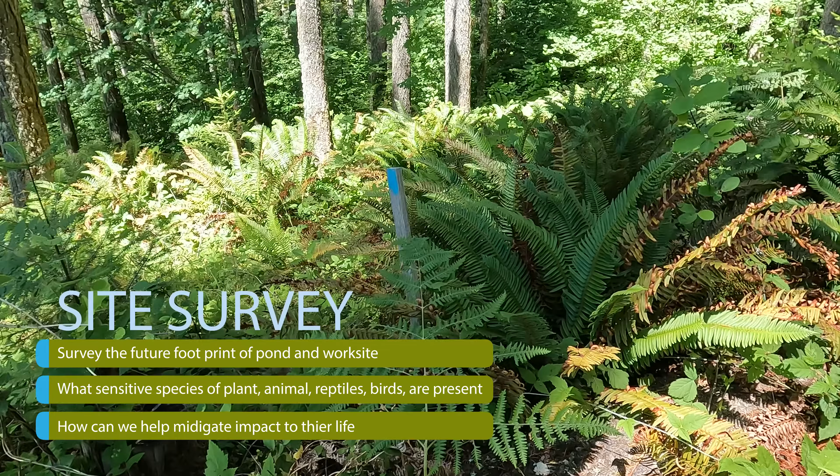You know, it's good to know what all the species are, both plant and animal, that would be impacted by earthworks in that area, and have a sense of if you're going to be impacting any sensitive species and potentially making a plan for also transplanting plants that could be used somewhere else in the environment or moved to a different area of the site.

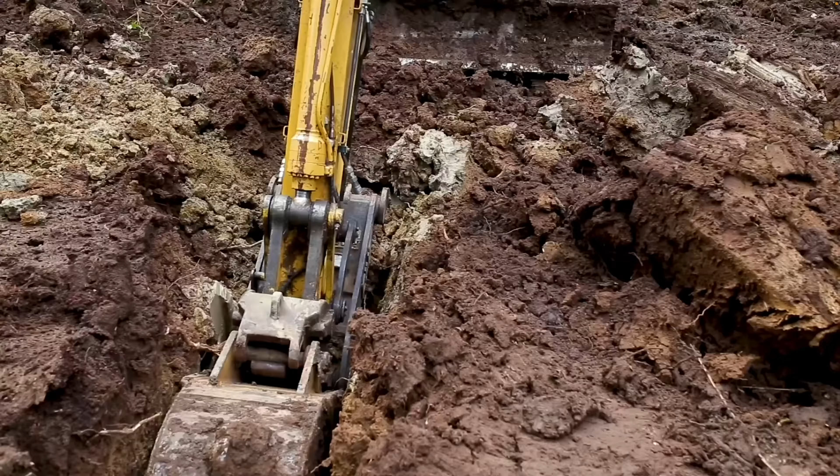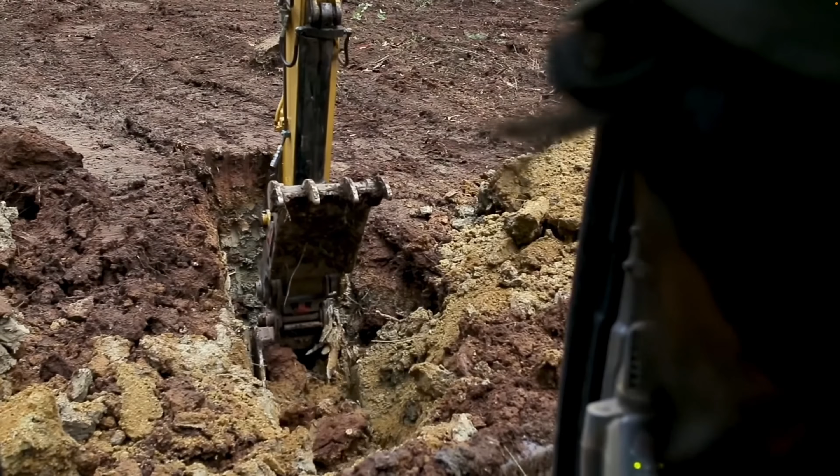A stage of equipment mobilization, potentially even prior to mobilizing large equipment for pond construction, is to have a machine that can dig a nice and deep test pit. So the test pit is very important because it helps you evaluate what type of soil conditions you have for pond construction. The day that you do the test pit is a day to both do field analysis of your soil and also collect soil if you wanted to send it off to a lab to have further samples.

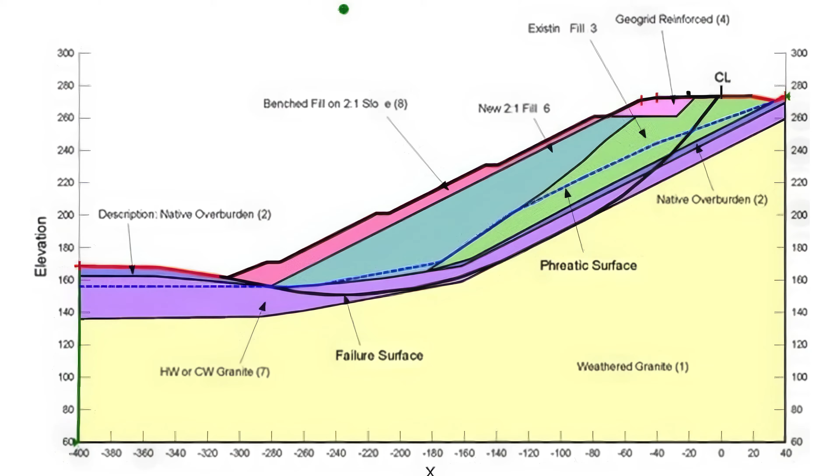It's also possible, and sometimes a very good choice, especially for larger ponds, to have a geotechnical analysis that's done by a professional, and they may even put down a series of boreholes. So there's really a scale of decision making around how much technical analysis you do. But if you're building ponds that need to be engineered, especially, and there's often with water resources departments requirements at a certain scale at which the ponds need to be engineered, a full professional geotechnical analysis may be called for.

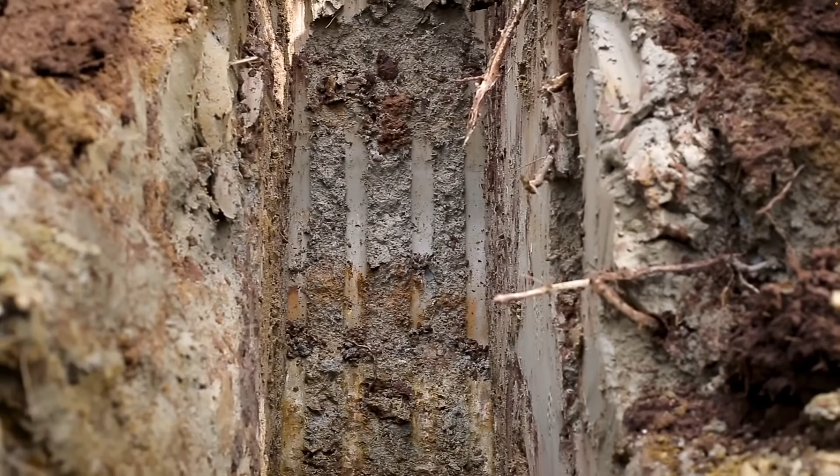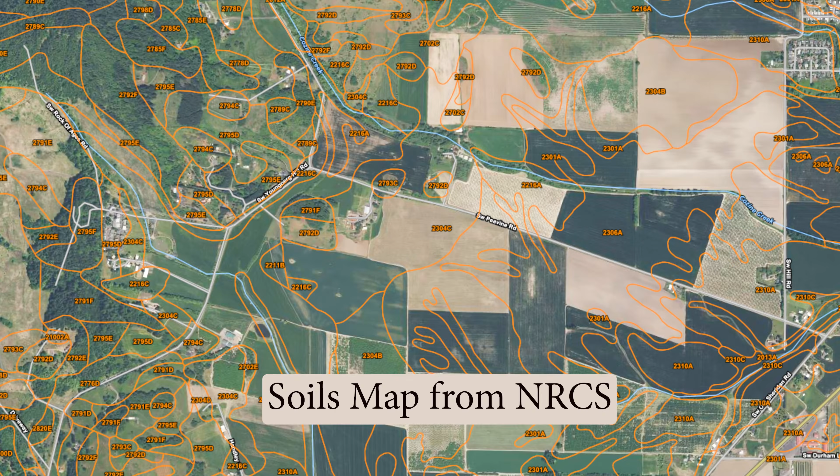When you dig the test pit, you'll be looking for a few things. You'll be looking at essentially proofing the data that you've already collected about your soil types from the NRCS or other soil resources. And so you'll be looking at the soil profile. You want to see what the conditions are of the different soil horizons. And though this really varies, you'll see that there's stratified layers within the horizons.

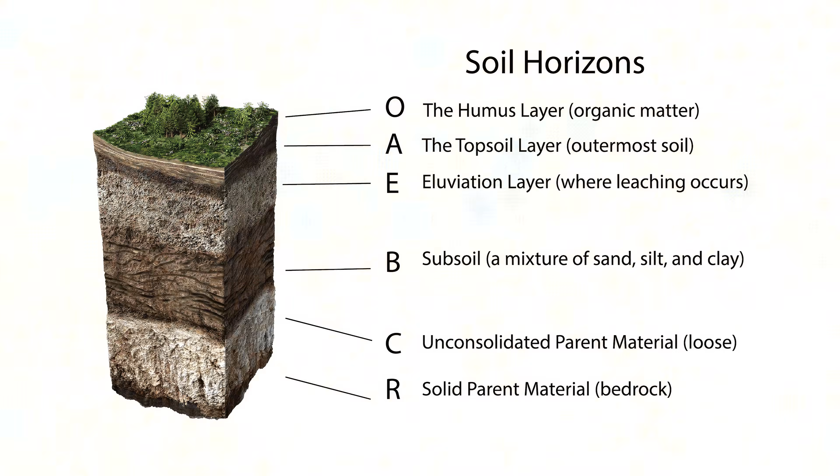And the ideal situation is that a soil horizon gives way as it moves down to a less porous soil, so that you would move from a soil that has water and percolation moving through it to a soil that is less porous and has water coursing over the top. And you may even see, after you've dug your test pit, that water is cascading down the side of that lower soil horizon. That would be a soil with higher clay content generally.

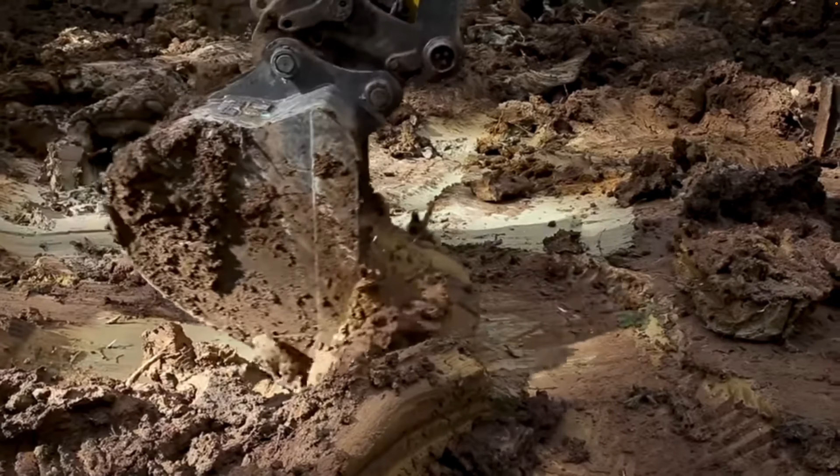And if you get into the subsoil and find that you have deeper layers of heavy clay, this is the material that you're going to be using to build the core elements of your pond and using to seal the pond. You want to dig a bit deeper than the planned pond depth in order to see what the entire layer of soil looks like below the pond. It's possible that a really good layer of clay could give way to fractured bedrock or cobbles from a creek bed at a deeper horizon. And so you really want to know the entire depth of your pond.

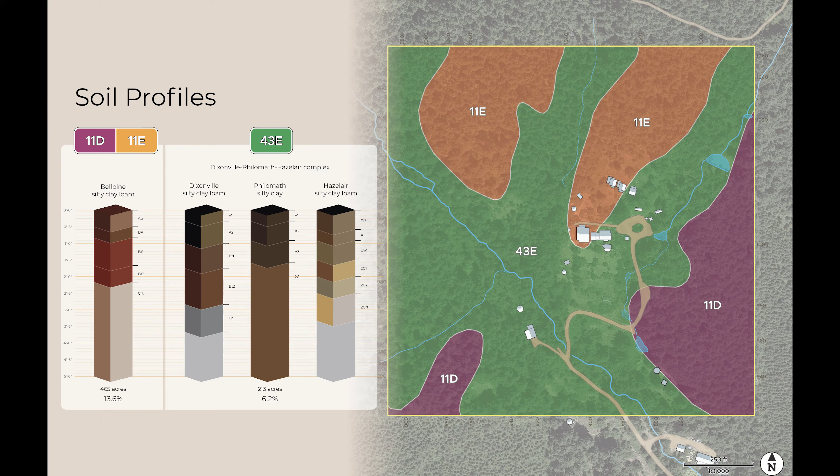Another possibility is that you find that you have soil that doesn't really suit a condition that leads to a natural seal. So you might have just a very sandy and porous soil all the way down. At this point, you'll be needing to evaluate whether or not you want to bring in material to seal the pond, or if there's another better, more effective approach to your project.

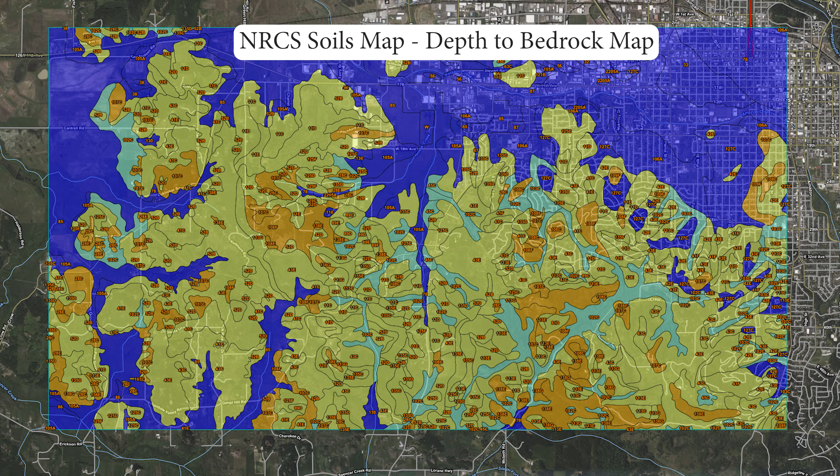The other thing that we are really wanting to look for is the depth to bedrock. In a lot of cases, the soil depth may be just a matter of feet before it gives way to fractured bedrock and then actual bedrock. And if that's the case, that's essentially going to limit the depth of your pond. So these are some really important initial notes to make.

So in addition to this work of looking at the cross sections of the soil, we also want to evaluate the structure of the soils. And so we can utilize a number of different field tests to look at that. We can carry out an analysis of the different soil profiles. And from each profile, we can collect clay and do a texture by feel analysis. And that's one way of determining whether or not there's enough clay to really adequately hold water. We can also look at the relative percentage of sand, silt, and clay by taking samples from each of our soil horizons and doing a jar test.

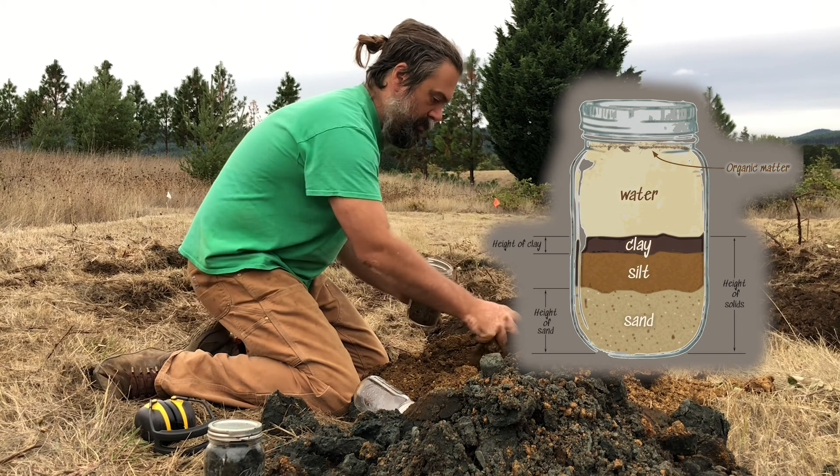Another field test is to look at water percolation by putting a nice gentle slope into your test pit, which is also really important as an aside to protect wildlife and critters and humans from falling into the pit and not being able to get out. You can use a nice slope to put in test holes for soil percolation.

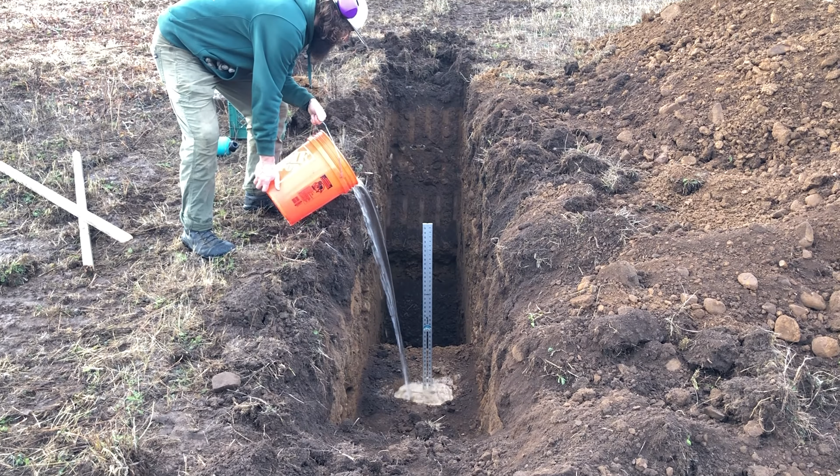And so we evaluate the rate of percolation to get another read on the soil's ability to hold water. We can also combine lab analysis with, like, the Emerson test and Atterberg limits to look at the way that clay reacts with water and expansion and contraction, plasticity. There's a lot of things that we can look to do this soil suitability analysis.

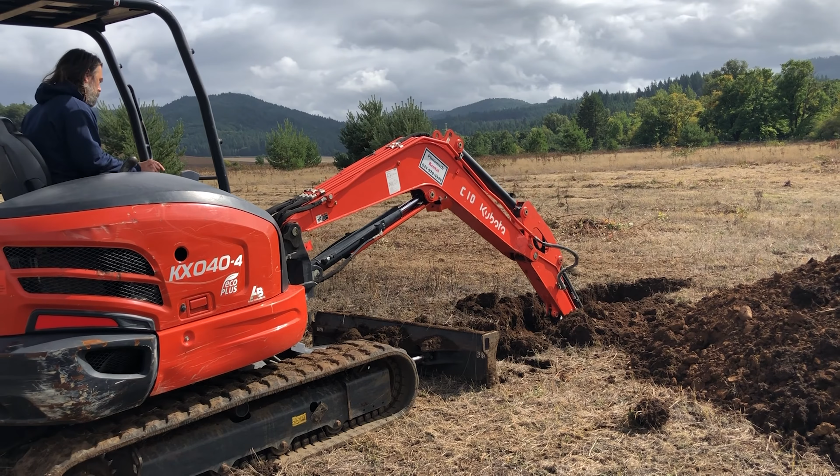One thing to consider for soil test pits is how many test pits you want to put in for a given pond. You probably want to put in a few because you're wanting to look at the entire basin. A few test pits at the dam site and a few back from the dam could be a good decision. You get your preliminary test back, and hopefully these tests really show that you are good to go for construction.

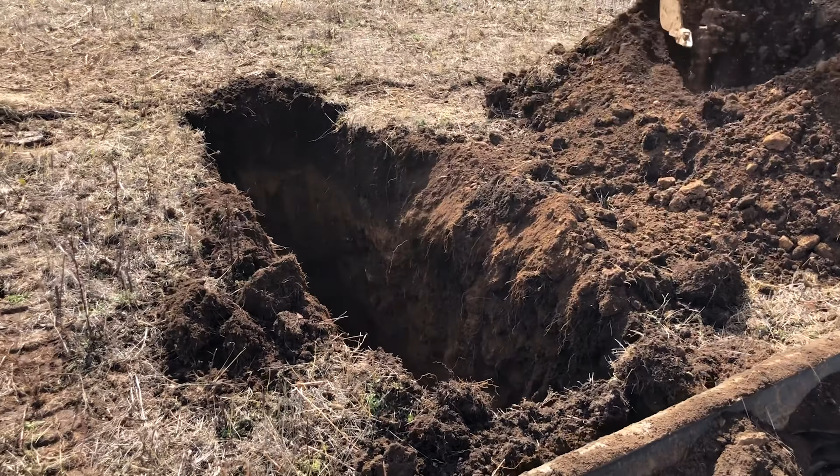Some of the constraints may also lead to further decisions around whether or not, for instance, large stored water is the best choice, or maybe you're going for a lot of just infiltration and bioswales and a different agroecology altogether. Or maybe you do need that stored water, so you're looking to bentonite clays or pond liners or something like that to really adequately hold the water.

Once we know where our pond site is, the next step is to generate cross-sectional and overhead view diagrams of the pond. We can look at how much soil we can expect to move. We can look at what is the total area that's going to be impacted, how many trees need to be removed, etc. We can start to perceive what some of the impacts will be on side slopes and things like that as we excavate to make sure that we're maintaining the proper inside slopes.

A cross-sectional diagram would show the inside slope of the dam, the outside slope of the dam, the width of the crest of the dam. It would show the back slopes of the dam and what those look like. It would also illustrate whether or not there's going to be internal terracing in order to do aquaculture and create different microclimates within the pond, and the depth.

Now that cross-sectional diagram can also illustrate the location of the clay that actually maintains a permanent seal on the dam and the bottom of the pond. When we look at a cross-section, we can see that there's really 3 ways to build the dam as far as the content of the soil type. The first and the best way to build the dam is to put in a key. Now, a key is really critical for assuring that the water doesn't move through the dam.

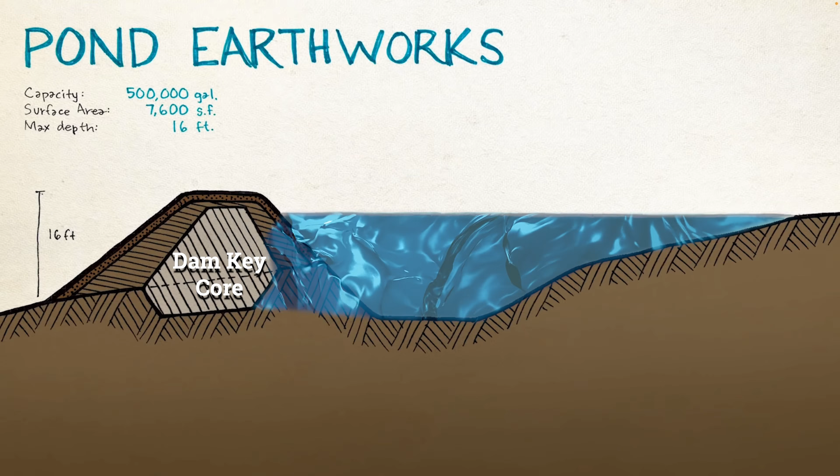As water moves through a dam, it sort of drops as it goes. It would slowly wick through a dam, and if it hits an interior clay core, a really well-built key core will prevent the water from moving all the way through the dam, which then would prevent channeling and piping through the dam that could lead to erosion and the blowout of the dam. It'll also just functionally keep water in the pond.

A keyed dam is built with an internal key that goes up and above the ultimate height of the water. The topsoil and the less clayey material creates a skin on the top and the sidewalls. Now the dam itself also has some very critical components. The best type of dam one can build is a dam that has a central clay key.

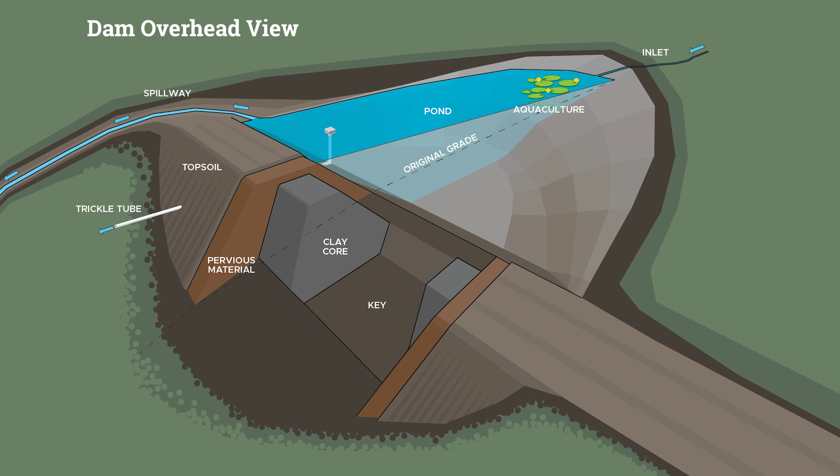It gets built into a trench that crosses all the way across the length of the dam from both sides of the valley. And this is where you put the best, heaviest clay material, and you'll build that key up, starting from that trench all the way up to your desired water level. So the key is a critical element.

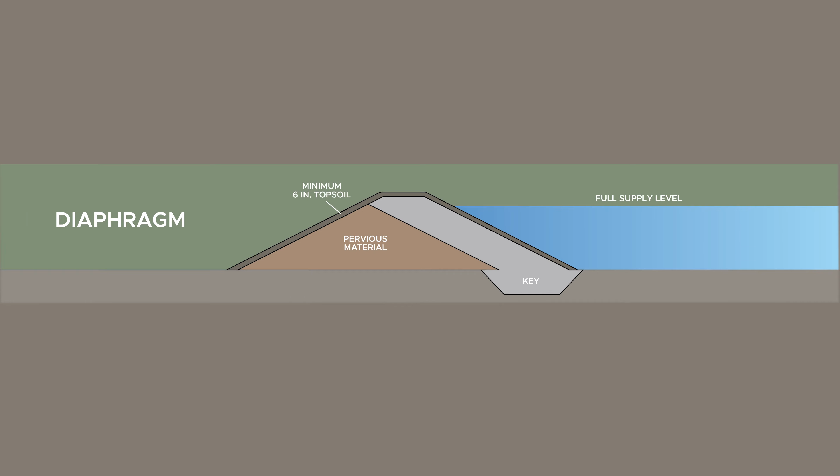If you don't have enough clay to build up a key, there is a second type of dam that can be built, and this is called a diaphragm dam. So this would be a situation where you essentially continue that clay blanket that's on the bottom of the cutoff excavation, and you work it all the way up the side of your dam. So you have an interior liner of clay that serves the purpose of preventing excessive water movement, at least through the dam.

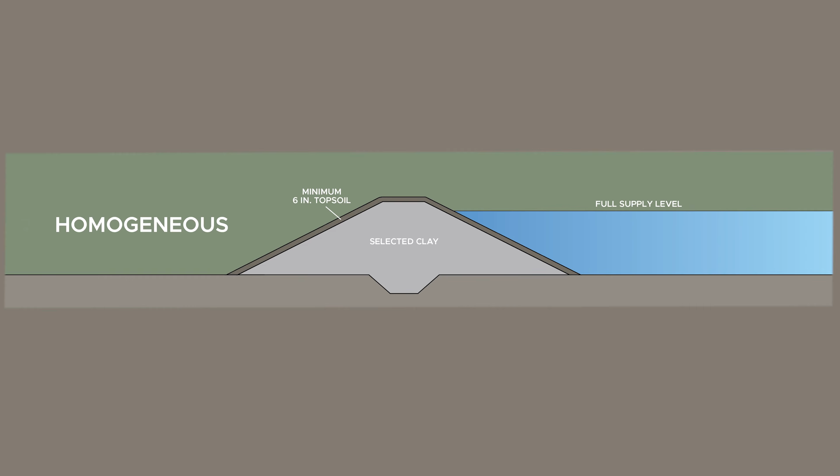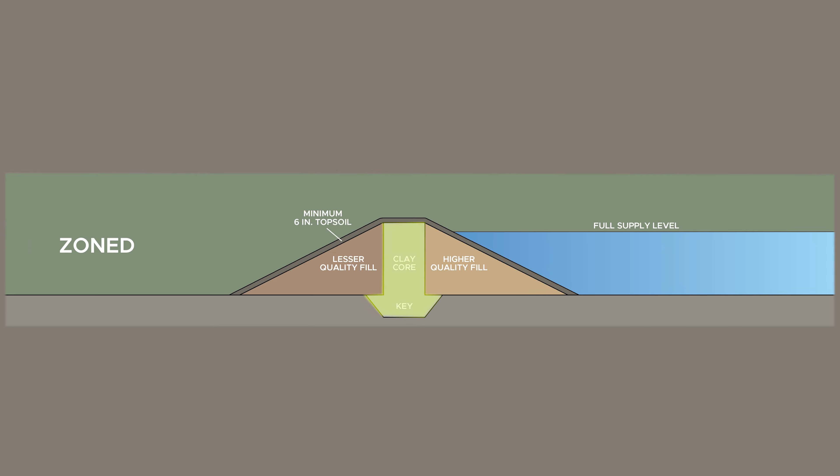A third type of dam, which really is not recommended and that I really try not to build. In theory, if you have enough clay, you can just build what's called a homogeneous dam, which is a dam completely constructed of clay, where the wall itself is keyed into that trench at the bottom center of the dam. Still, it's always a good idea to really maximize the heaviest concentration of clay at the center of that dam to create that permanent seal.

Starting from the bottom of the pond, it's very important to keep in mind that the bottom of the pond needs to be excavated all the way down to the impermeable layer.

So if you have clay, the bottom of the excavation, and this is called the cutoff excavation, should be at that impermeable layer and connect with the dam. The dam then sits on top of a keyed in depression that goes even deeper into that impermeable layer.

Now, if in your excavation you dig down and you hit fractured bedrock or some more porous layer at the bottom of the pond, a workaround for that is to lay down a blanket of clay that sits atop that layer, which ultimately would be the impermeable bottom of the pond. And it's very important to key this into the dam so that there's a complete seal along the entirety of the bottom of the pond.

So if we now look at the pond from a bird's eye view, we can talk about some other key elements. One is the spillway. So the spillway is the way that we pass live flow around the dam. Every pond needs a spillway. The spillway needs to be designed to handle the flow or the discharge of the watershed through itself, and the ideal spillway is built to handle 3 times the total storm flow coming off of the pond.

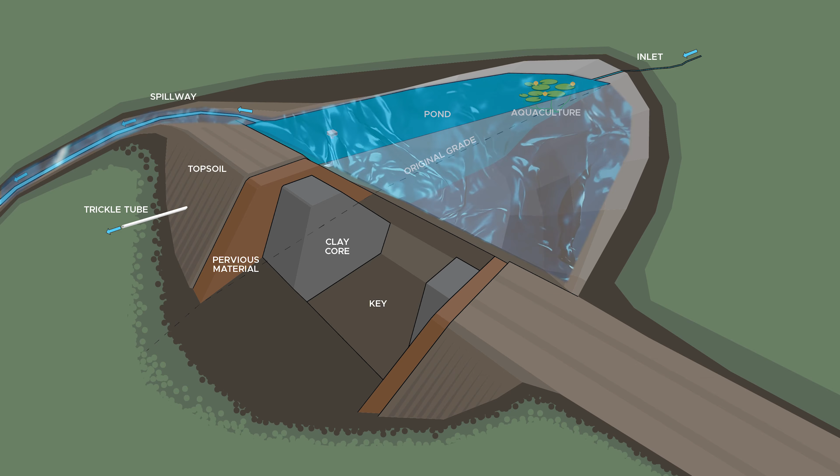The first key to a spillway is that it is not built over or even within any of the loose soil that is left from the dam construction, but instead is built around the dam into the native soil on one side or the other of the valley. The spillway is for moving flow out and around the pond when the pond is full. The height of the bottom of your spillway is going to determine your ultimate water height in your pond.

The ideal scenario is that from the top of your dam to your water height, you have typically 3 feet for large ponds, and for small ponds, at least 1.5 to 2 feet of freeboard. So freeboard is the term for the distance from the ultimate water height of your pond to the dam top. Now this assures that under no condition will water go over the top of your dam and find a new point to flow over and erode the dam. So the spillway sets the height of your pond water and therefore your freeboard. Technically, freeboard represents the vertical distance between the top of your spillway and the top of your dam.

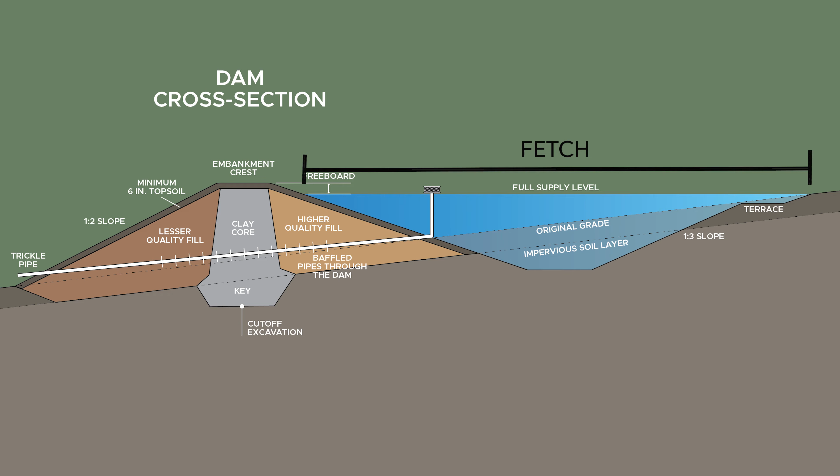One way to determine the height of your freeboard is to look at the horizontal distance from your dam to the backside of your pond, and that's called the fetch. The longer the fetch, the more potential you have for wave action, which could lead to the water overtopping the dam. One way to minimize fetch is to build an island and have that island intervene in the wave action that could be affecting your dam.

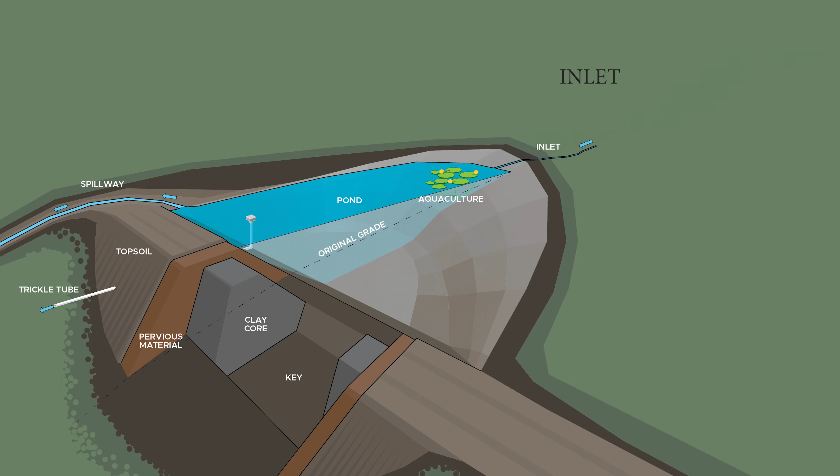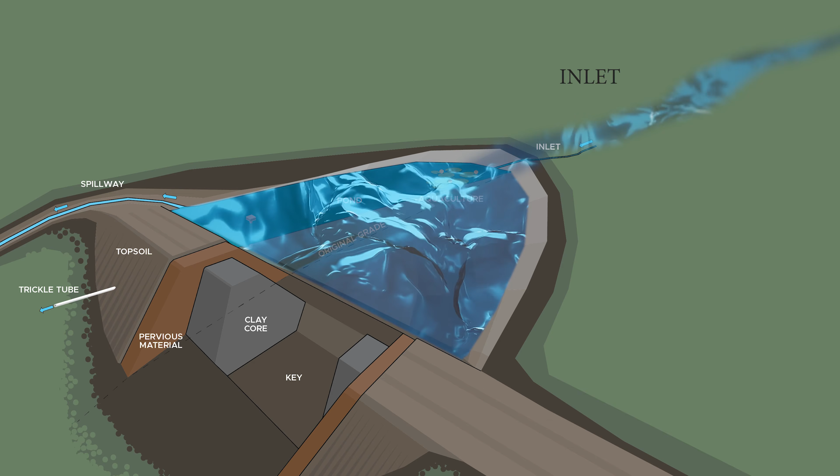Another element to consider is your inlet. On steeper ground, as you construct your pond, you can create steeper banks behind than the natural landscape condition, and in those situations you may have water seeping down or pouring down those banks. It can be really important, one, to make sure that the backside of your pond is built to accommodate some saturation in water and won't slump after the excavation.

At the inlet itself, where the water courses through, you might see an erosion gully form and a head cut, and this could be one place where that water causes erosion and leads to slumpage and accumulation of sediment in the bottom of your pond. So right away, it can be a good idea to put live stakes or woven bundles of willow and red stem dogwood or any other type of woody riparian plants that you have on hand to anchor that space. In the near term, those live stakes may not provide very adequate erosion control.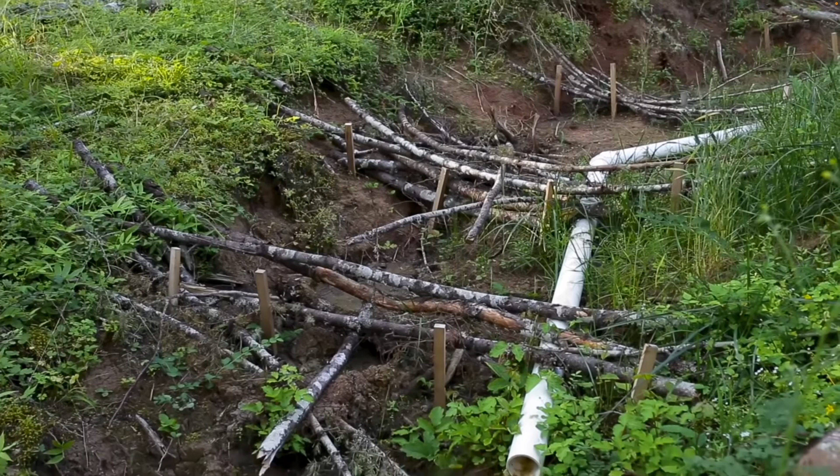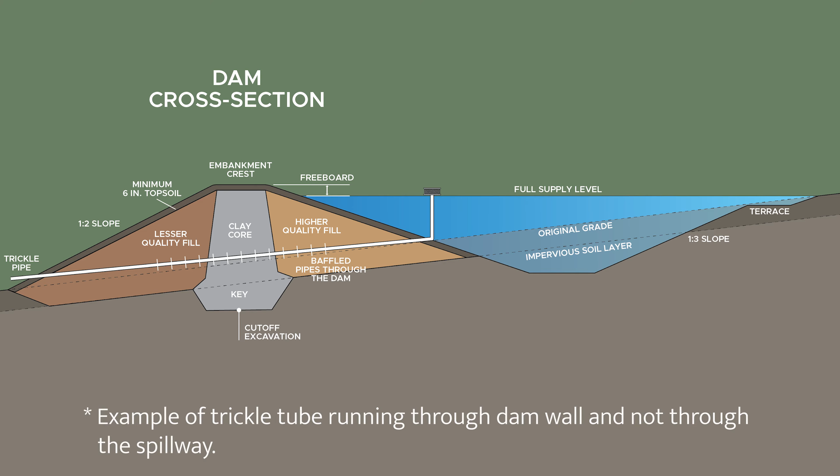Another element to consider in the process of construction of the spillway is the trickle tube. So a trickle tube is classically used to minimize small seasonal flow over the spillway. So this cuts down on just the long-term erosion of a small trickle as it moves over the spillway. It basically skims surplus water and moves it via a pipe around the dam and puts it back into the channel. The trickle tube can be installed at the same time as the spillway is built in connection to the dam. And it usually wants to just run right through the edge of the dam and out. You would basically be wanting to have a tube that's big enough to accommodate your seasonal flow.

And the spillway then can be thought of as a way to handle surplus flow and storm surge, as well as if you have larger flow during certain times of the year, that would be more likely the route for that surplus water. The trickle tube can also be used as a way to skim a portion of the surplus and route it out to another storage. So a trickle tube also can be a way to carry water via a pipeline to another pond.

So in this way, if we're actually diverting water out of a drainage, we can be sure that the bulk of the water during the rainy season continues through the spillway and through its natural riparian ecosystem. But the surplus water, or a portion of that surplus, can flow to the trickle tube and be carried out and beyond the valley. It can be carried out to the ridge, or it could even be allocated to go to a valley pond the next ridge over.

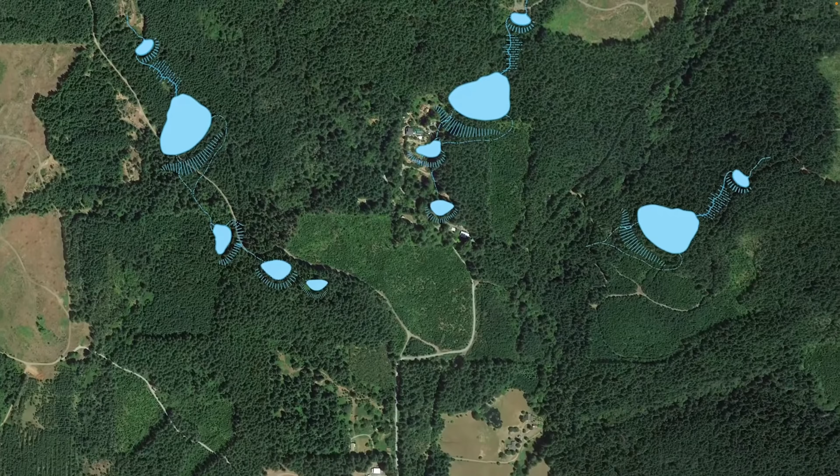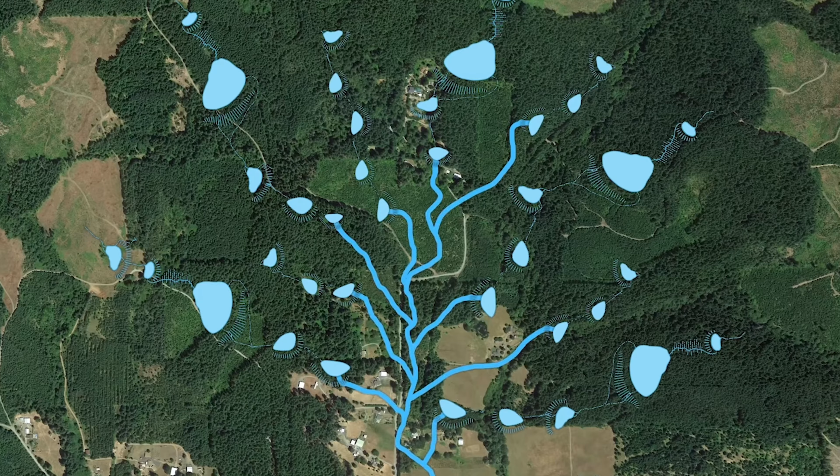If I feel like there is an intact riparian ecosystem with the integrity of a natural waterway, I don't like to take water out of a valley and permanently divert it into a next valley over. It's important to consider as you move water from valley to valley, if you're doing watershed scale earthworks, that you might not want to steal too much water out of any given valley. So a trickle tube is a way to take just a small amount.

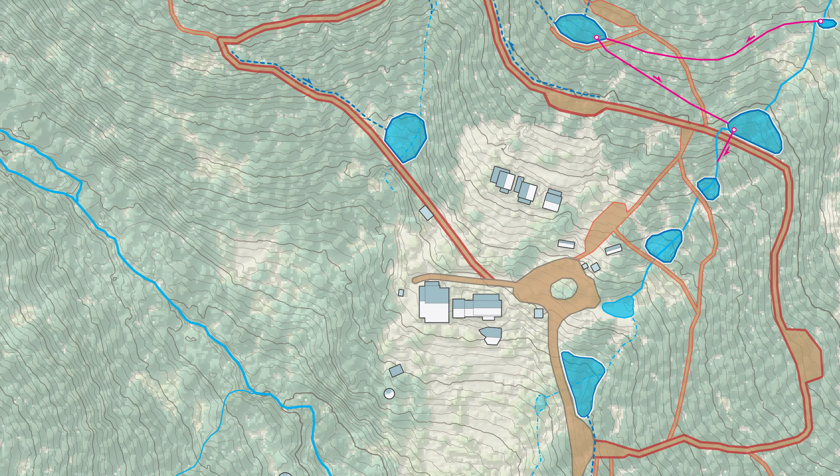You can also have an overflow swale that's separate from your spillway to do a similar function if you have the type of soil and the surplus water to do that. Generally speaking, I think it's very important to consider the idea of moving water from valley out to the ridge and back to the valley before just moving it from one valley to another.

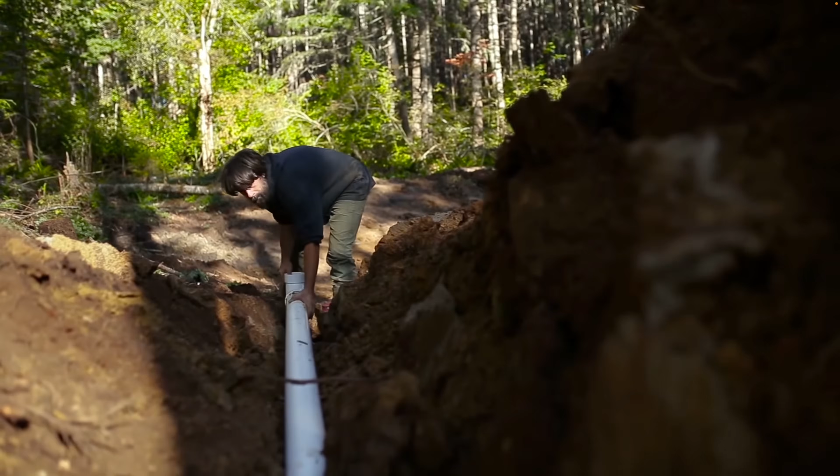The final element to consider is the outlet pipe. You'll want an outlet pipe if you're using this water for any irrigation use. It's important for aquaculture and fish culture, and it is also important for draining and servicing the pond. Oftentimes, people will build the outlet pipe right through the center of the dam. In that case, the most important thing is that this pipe is made of long-lasting material. I would recommend just using a good PVC.

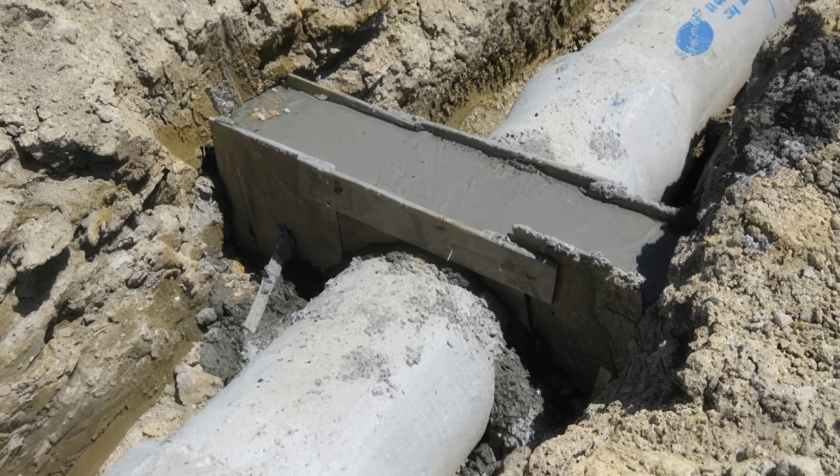Very importantly, this pipe should have cutoff collars installed along its length. And what these do is they prevent flow from moving along the pipe and eroding along the pipe and creating a tunnel through the dam. The proper and long-term well-being of the cutoff collars is really important. People will pour concrete forms around the pipe as it's laid through the center of the dam. You can also use rubber collars that slide along the pipe. And if it's a steel pipe, also weld cutoff collars.

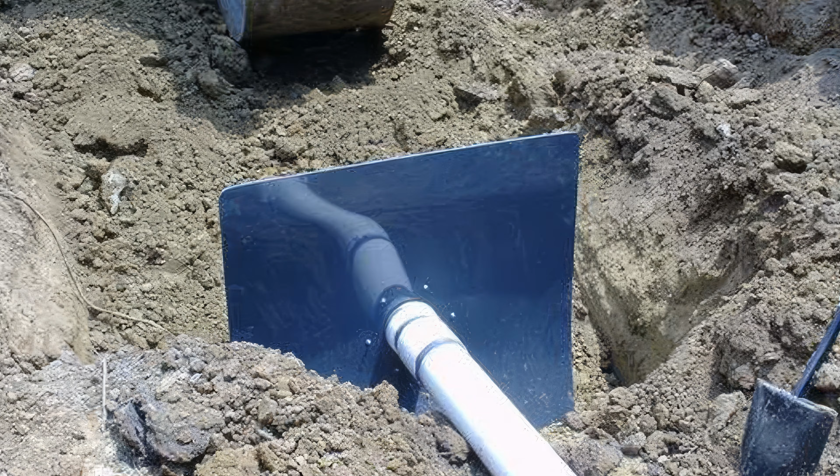The trickle tube usually just has a single cutoff collar. You can have more than that, but the trickle tube also needs to be outfitted with a cutoff collar. Another option for the outlet pipe is to have the pipe just go right over the top of the dam and have a siphon. That's a sort of easier and safer way to go, but it takes a little bit more maintenance.

You can run your pipe up and over into a screened intake in the pond, have it go up and over the dam and back down, and there's certain conditions you need to be able to create an adequate siphon with enough drop to really get that water moving well and into the pipeline. The siphon can be primed simply by filling a 5-gallon bucket and pouring it into a T at the top of the pipe from the dam. So that's a nice sort of low-tech way of priming the pipe.

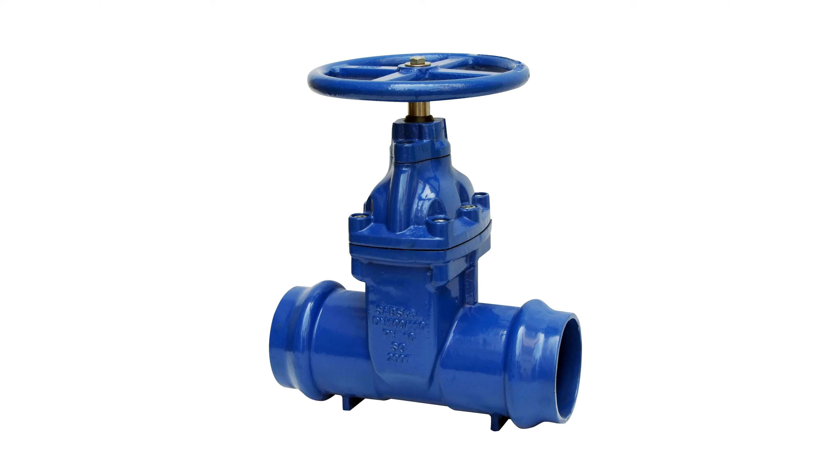Valves for controlling the flow of water through the outlet are important, and it's important to use a gate valve type, which would be one that you can screw down slowly and open slowly in order to moderate the flow and not have it come out in a single burst.

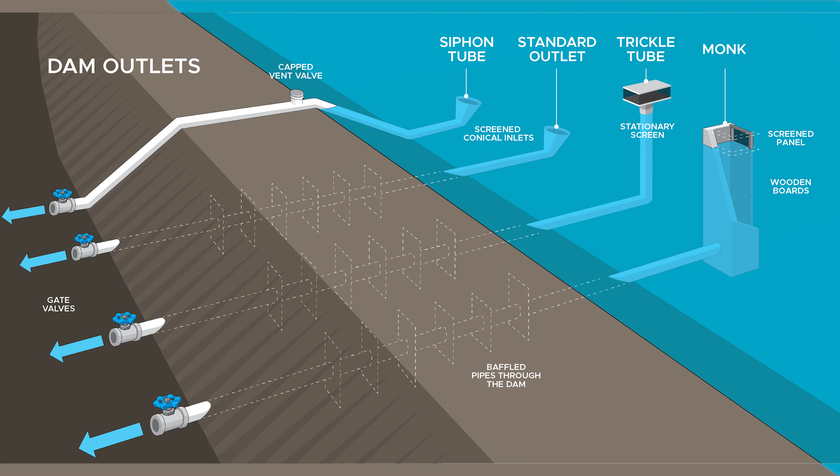The valves can go on the inside, within the pond, or outside, and it's really a matter of preference, but most people put the valve on the outside of the dam because it's more accessible and it's not exposed to water. The outside valve can take more pressure, so it can end up being more leaky, but the inside valve, being exposed to water, can degrade quicker. It's a little bit more challenging to maintain and to service.

So my process with construction is to start by clearing the topsoil of all organic material and debris and getting down to what feels like an adequate workable material for the main frame construction of the pond. This means that we're removing at least the organic and maybe the A horizon of soils. That typically just gets pushed downhill of the dam, and we'll use that later to skin the entire outside of the dam.

The area that gets focused on next is the cutoff excavation zone of the dam itself. So we're excavating down to the point where we have the adequate type of non-porous and strong material to anchor the pond dam into.

So we'll excavate that material down until we're at that satisfactory depth, and also relative to the ultimate depth of the pond itself. Then at the bottom of that excavation, we build a little key for us to start piling the best clay, the best heavy, strong material into the core of the dam, and we'll build that up.

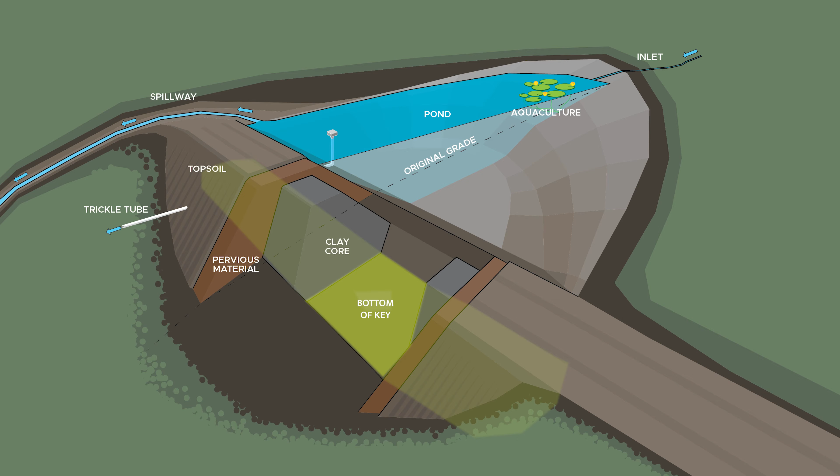As we make that excavation, we want to be careful, first of all, not to scratch and break up the dirt, the clay material at the bottom point where the dam will anchor into, because that can create a weakness point. But we can go to the outside edges of the dam where it's going to key into the side of the valley and create notches with the bucket, the teeth of the excavator, for it to get packed and keyed into on both sides.

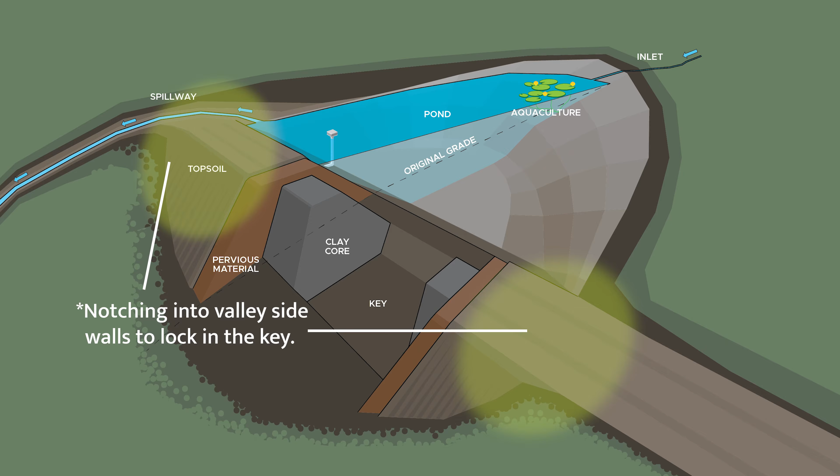Once we've done that, we can start to build up the key. Now, if this surface has become really dry, it might be necessary to wet it down a little bit to get that good connection. And we'll start to add layers into that core. And as we build it up, we want to build this core up as we go, so that that perfectly thick clay core goes all the way up to above the height of the ultimate water level.

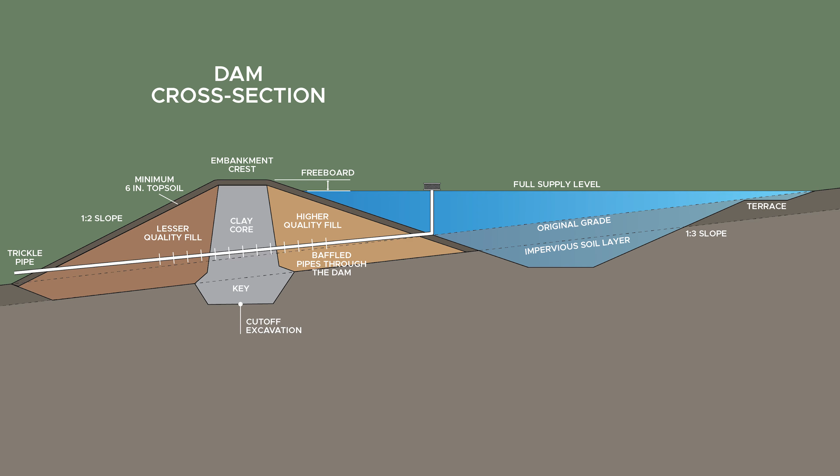Sort of simultaneous to this, we're stealing material from other subsurface soil horizons adequate for dam construction and piling that on both outside edges of the key. And as we go up every couple inches, we want to make sure that we get adequate compression on the top of this dam wall to make sure that it gets really compacted and stabilized.

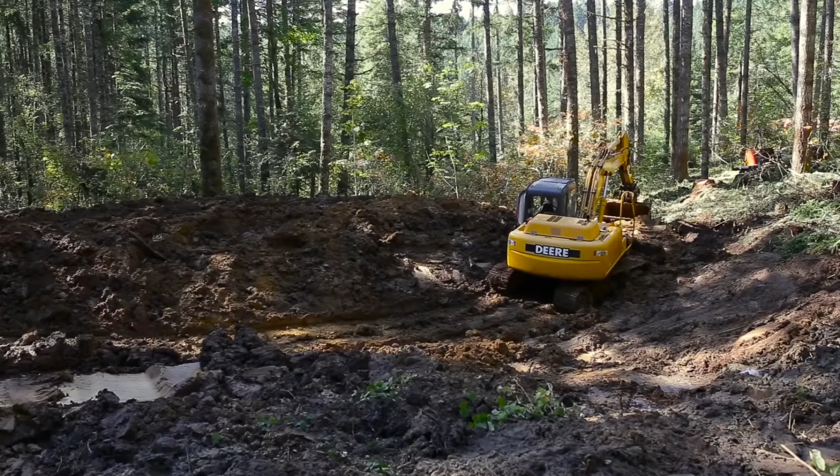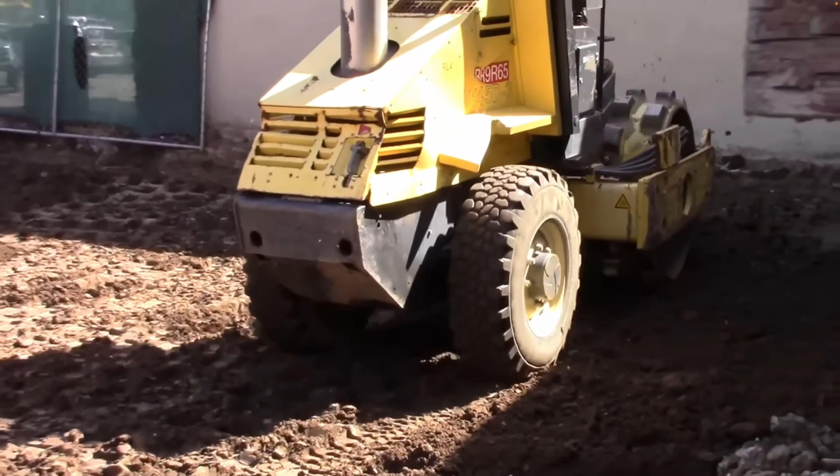Usually it's really useful to use a sheep's foot roller to do that compaction, and there's calculations that can be made by volume and by the type of clay that we're working with to determine how much weight and how many passes of a roller we need to utilize in order to get that good stability. We can also track roll with the machines we're working with, bulldozer, excavator.

On small ponds, I have actually used a rototiller to till and create a compacted layer, and doing that as we go all the way across. The rototiller actually creates a good compacted layer below it in the clay soil. So compaction is really important.

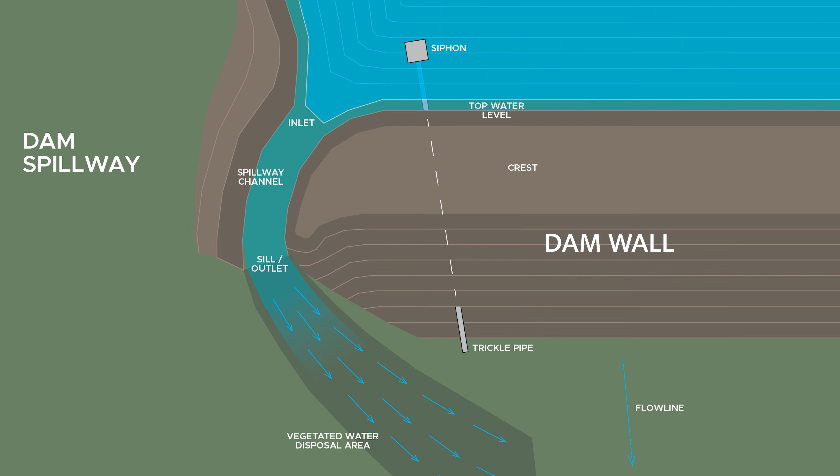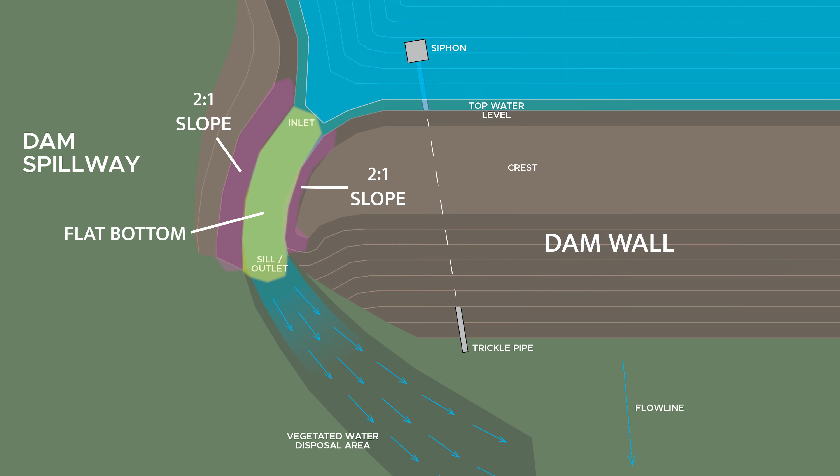As we build the dam up, we get to a point where we can be looking at the connection to our spillway. And so once we have built up to that ultimate dam height, we can cut that spillway into the side of the dam, into the native soil of the side slope of the valley. And that then gets built with the same 2-to-1 slopes on the outside and a flat bottom, and designed so that it can pass that water well around the dam. You never want to build a spillway over the top of a constructed dam, as it will erode the dam.

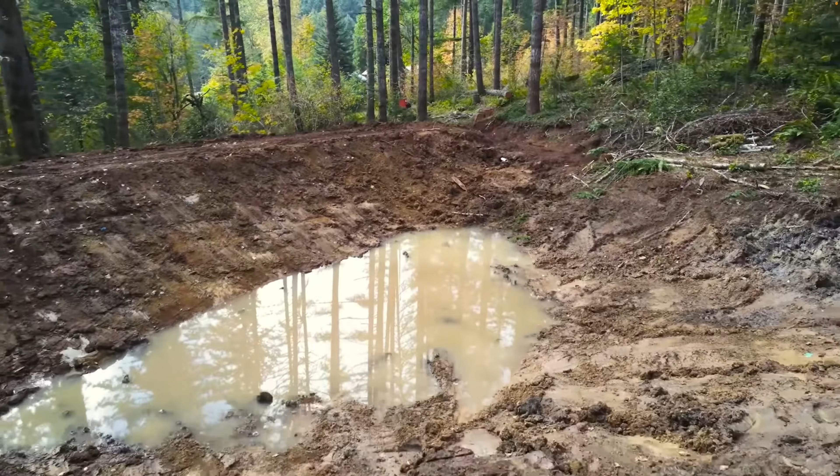Once we feel that we've adequately gotten the main frame of our dam, we can work on smoothing the top, and we can go back and do final shaping on slope on the inside and outside of the dam. As we build up and remove material from the excavated section of the pond, we want to be also sure that we're creating a non-erosive slope on the backside of the pond. And so we'll be looking to have a 1-foot rise by 3-foot run, typically going all the way around all sides of our pond. Once we have the dam shaped and the sidewalls of the pond constructed, we want to come right in with seed.

Bunchgrass seed is a very good choice for the dam surfaces. You can also stamp in seed from native juncus and sedges. But the most important thing is to remember not to put any woody plants on the dam itself. So you never want to have trees or even any really woody plants growing on the outside or inside of your dam. If they are, they can put their roots through to reach the water, and that'll create a channel for water to flow through and compromise the dam.

It's also important not to have large trees in a location where, if they were to be thrown over and uproot, they could break your dam substantially. Your spillway also every year should be evaluated and cleared if there's any accumulated sediment or certainly brush material in it.